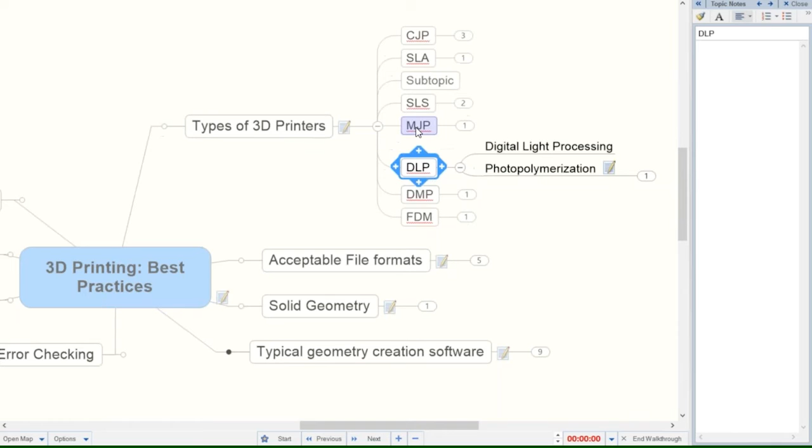Then you have digital light processing, or DLP. It's a process that essentially uses an ultraviolet laser and applies that laser to a liquid vat of material, again solidifying both the support and the actual finished part. It's a really interesting technology.

Then, believe it or not, very popular lately, direct metal printing, or DMP. Again, a technology where you have granular material with a hardening application, usually with lasers.

FDM is probably the most common. People who have only been exposed to a few 3D printers have heard about FDM in the form of the MakerBot or the plastic spool of printing, and that's considered FDM.

Basically, when you're ready to print one of your designs, or as we like to call it, bring your designs to life, the typical format is STL.

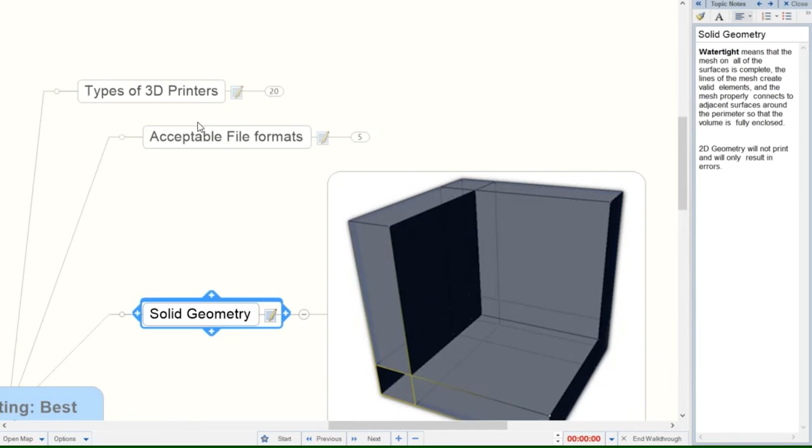STL is technically short for stereolithography, and the technology itself is also called stereolithography.

So the STL format, although it stands for stereolithography, has been the go-to file format for exporting your geometry out of the design author software.

Meaning that whether you're using AutoCAD or Revit or Rhino or some other application, STL is probably the most common format to export out.

STL has a couple of different options, like binary, and I forget the other one actually.

This happens, getting old. Dolly was kind and didn't indicate how old I am, but I do have a lot of years of experience in creating geometry.

So being an Autodesk reseller, Microsol Resources has an interesting combination of skills and offerings for you. Not only can we help you bring your designs to life by offering 3D printing services, we can also help you generate that geometry using the most common Autodesk or Rhino McNeel software.

So STL is the most common output. So whether you're in, and we'll talk about the actual types of geometry software that's available. So for instance, when I step back a minute, this is basically my presentation today. Talking about the 3D printers, we learned about the technology, and again, we can revisit that if anybody has any questions. Now we're talking about the available file formats, STL being the most common.

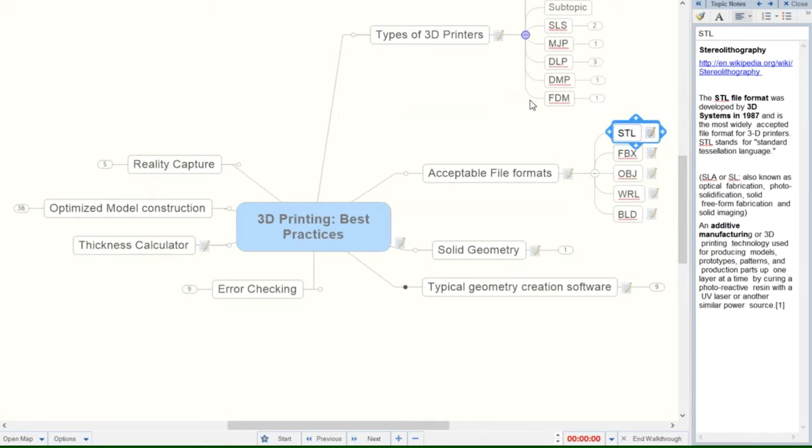But in CJP, or color jet printing, we're talking about an opportunity of adding color to the model at the printing process. So in your design authoring software, you would want to export a format that brings the color with it. STL is not that format. FBX, it's kind of interesting that it's the second file format that I'm bringing up. FBX stands for Film Box.

It's an Autodesk-generated file format, but has found itself all across multiple industries, all across the 3D printing geometry creation world. So that FBX or Film Box file format is finding itself in Revit, in AutoCAD, in 3D Studio Max, in Rhino. Again, we'll talk about the geometry creation software, but FBX is a great output, and it brings the color with it, baking everything in one file. So no maps or materials need to be sent along with the file.

OBJ is an interesting file format. It's been around for a long time. It's very useful depending on the output software. The WRL or VRML, the virtual reality modeling language, is very similar to HTML, but it's interesting that this single file format exports your geometry and brings with it color, materials, and textures. The only caveat is that when we export VRML or WRL, it requires us to export and include those maps as well.

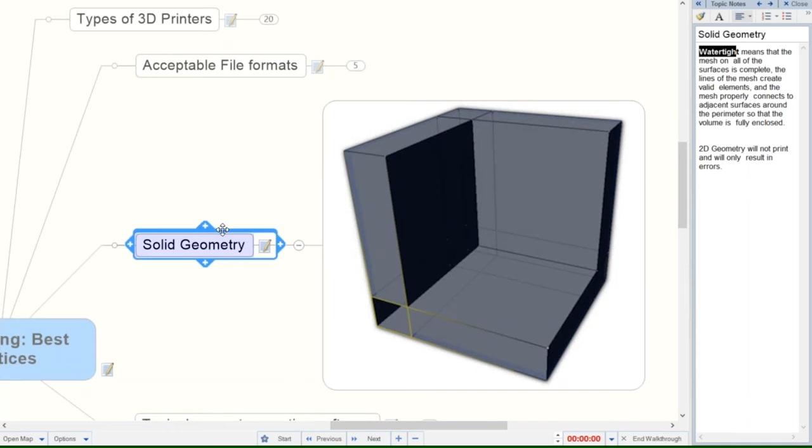When we do consider solid geometry or watertight, these are Googleable terms. So I'm going to show you a couple of great articles that talk about it, but basically you'll be able to find it. The industry is fantastic for assisting people in understanding what can come of it. What kind of software can I use to create a solid watertight file? You name it, we're going to be able to help you do that.

So I think most of the people in the office are using Windows-based applications to create architecture and such. Anybody using Macintosh? Not in the office, but I'm sure somewhere online. Do we have any questions? No, I don't see any questions at the moment.

Because we're an Autodesk house and a McNeel house, at the top of our list is Autodesk applications, and these are just a few of my favorites. So as Dolly mentioned, I'm a BIM specialist as well as a 3DP specialist, BIM standing for Building Information Modeling. Revit is the most fantastic tool for creating architecture and engineering models for the purpose of visualization, documentation, and obviously

3D printing. So when you create a model in Revit, you're going to have access to an STL out option or simply export to FBX. Those are two of my favorite options for exporting. It's right here available. So I have a couple of models in the back created in Revit Architecture. Those models were simply exported as STL and printed. If I wanted color, I would do FBX. Revit is a fantastic tool.

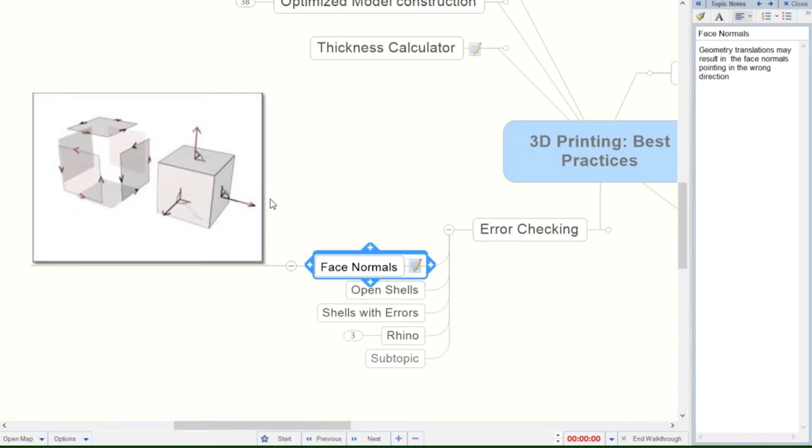So in this illustration, all of the individual surfaces were generated in the same rotation in 3D space. All of those vertices were shared, meaning they're coincident, resulting in a geometry that has all the normals facing out. So that's the first thing we look at. And a lot of my 3D printing software will just automatically fix that because it sees the center of the object and it pushes all those normals outwards.

The second thing is open shells. We're going to talk about that in a little more detail in the Rhino example, but when I'm talking about open shells, similar to that other image I showed, here it is over here, that's an open shell. So this face is considered a shell, and if it's open, then it doesn't close and make a watertight surface, resulting in an error.

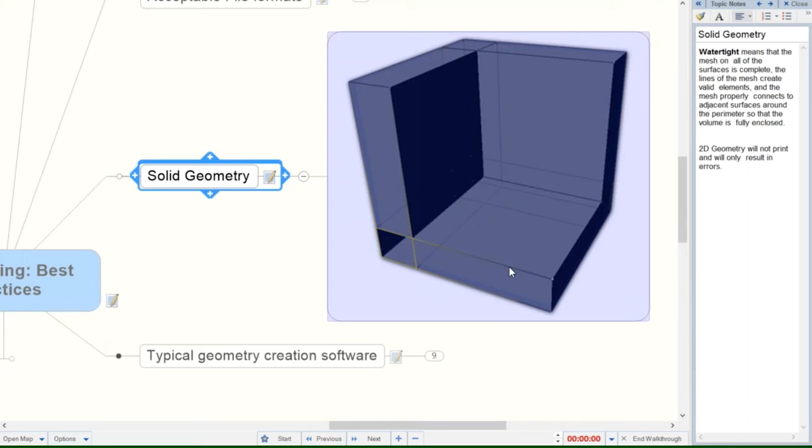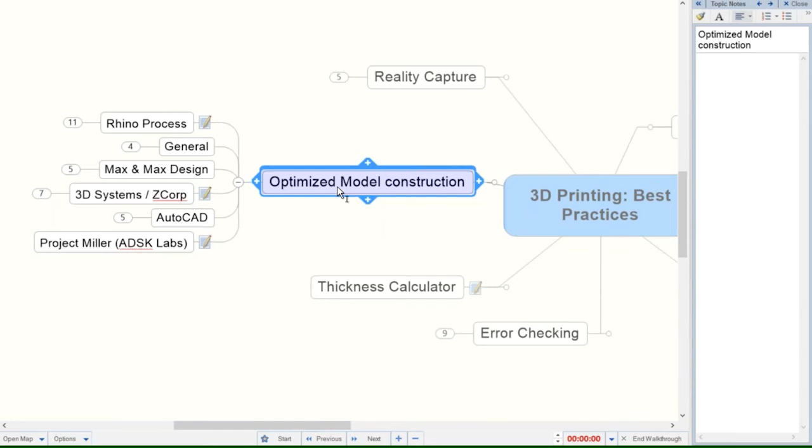Shells with errors, whether it's holes or line work that overlaps the individual face. We're going to talk more about that. Rhino has a series of tools to assist in fixing those pieces of geometry, and I'm going to expand it out over here and talk about that. So what are the methods for, one, modeling correctly originally, and then what are the error fixing commands and tools?

Let's talk about Rhino. Of course, I could spend a day or two talking about the processes of creating error-free, 3D printable, watertight solids, and I'm developing a class at the moment just for that purpose alone.

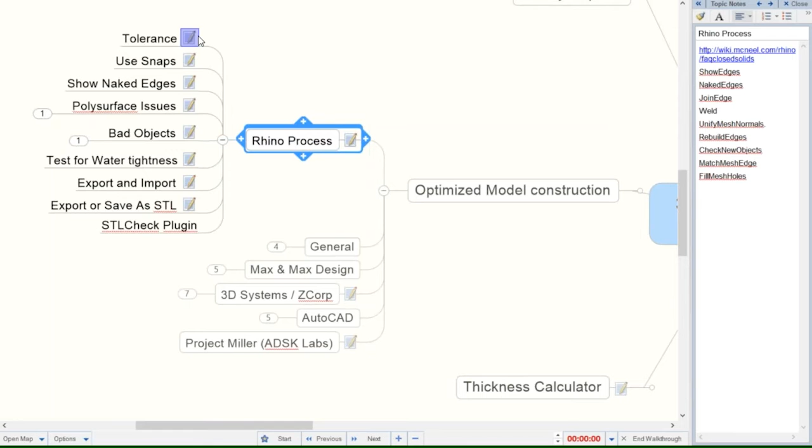But when we start learning about using Rhino, there's a series of processes, and this is somewhat in order of importance. So when you first get started, we're talking about tolerance. So you start with a Rhino model. You say, this is about what I want to create. I know it's a product. I know it's a building. I know it's a boat. I know it's a car or a toothbrush, right? So when you first start, you can use a template from Rhino, or you could essentially say, I want to start with a particular set of tolerances, particular set of things.

So when we're talking about tolerances, we're talking about the setting that dictates the maximum permissible distances apart that two objects or elements are permitted to be and still considered to be close enough for your purposes. What does that mean? When we move our cursor around the environment, you could see my cursor moving around like this, in different 3D geometry software, there's always an object snap or a world snap setting.

So setting a tolerance in Rhino means that my cursor is only going to move a particular set of precision or a particular set of fraction of unit, right, depending on your unit. So setting a tolerance within your design software is going to mean that it is most likely to be closed when I mean to be closed. You following me? I don't know if you've used AutoCAD. Anybody in here in the office use AutoCAD? So AutoCAD, snap versus object snap, two different settings.

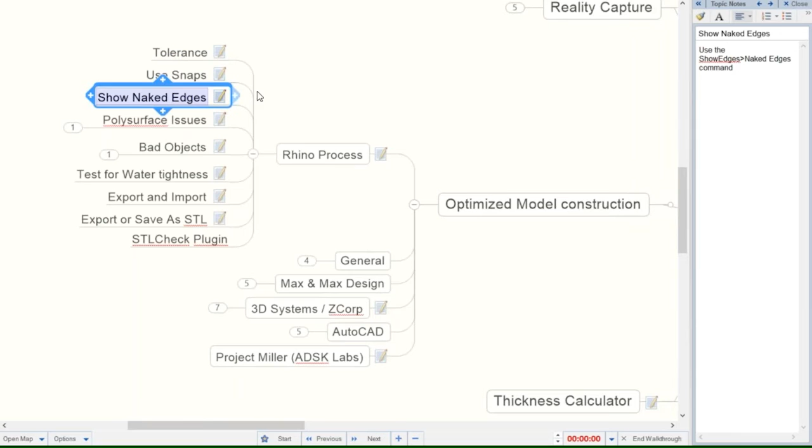We're also not going to want our surfaces to not intersect or touch or close. Tolerance is the place of moving. Snaps is, again, like I said, snaps or object snaps. Again, making sure that your cursor has a series of tolerances to be constrained. The result is going to be an object that is closed. Then we start to get into some discussions. Hey, don't think dirty when we're talking about naked edges. We're talking about objects that are not closed, and in fact that edge is open to the space and not coincidental or closed with another surface.

Then you have polysurf issues. So an open polysurf is similar to naked edges, but essentially means there's a hole or something not closing the internal volume. The command is SelOpenPolysrf. And as you type in Rhino, you start to type the commands. It shows you a series of commands that start with that set of characters. So it's really easy to find these tools. Of course, you can always go into the toolbar settings to figure that out.

But then there's a command that will show you what objects are bad. So the select polysurface is also going to do that. It's going to highlight different colors and illustrate what kind of problems the software thinks is happening, again, based on your tolerance. So SelBadObjects is going to highlight and give you an opportunity of selecting the objects that are bad. You go one by one. There's an actual dialog box that shows you what it looks like. So I'm going to actually see if this link opens up.

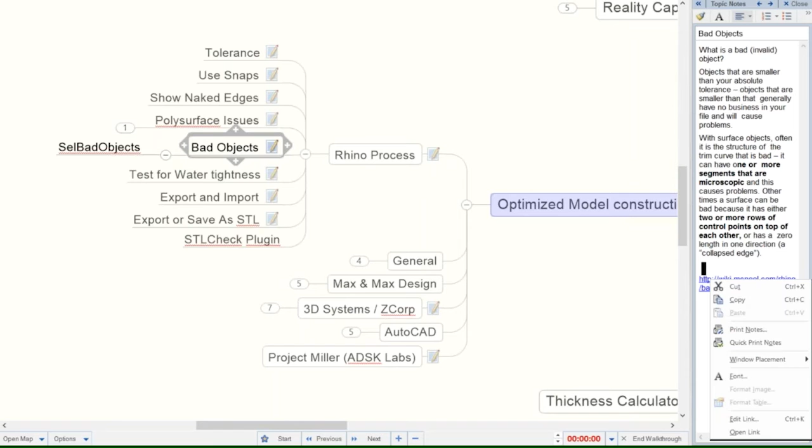Here it is. Here's the McNeel wiki about fixing bad objects.

What is a bad object? How do I know I have one? Use the 'select bad objects' command.

Suppose I want to take them out and replace them, so extract bad surface. There's an enormous amount of tools for working in Rhino to make an object ready to be printed.

It's going to bring you to those objects and highlight them. If you don't run these commands, Rhino will complain if the object has those problems in the first place. It'll tell you that a certain number of objects were selected but only a certain number were exported when you do the STL.

If I search 'Rhino Wiki Solid,' that's another great resource, bringing me to a different page on the McNeel Wiki: how do I make a solid model? There's an enormous amount of resources, one of the reasons why I love McNeel and Rhino.

They really are doing their best to help you out. A wiki is something contributed to by the community and the industry, as well as by the employees, so it's an amazing resource for your viewing pleasure.

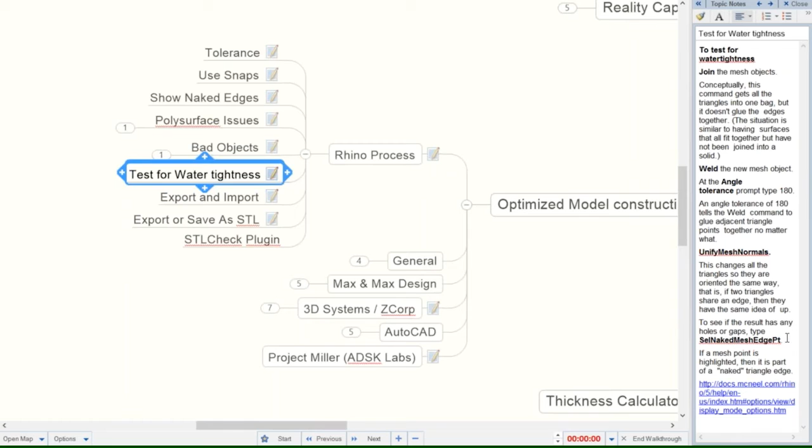Things like testing water tightness. It's a simple option, you just start to type 'unify mesh,' or 'select naked mesh.' Look at the length of that command.

They're really easy to find. They're not difficult, and there's a lot of really good resources available to help you find that.

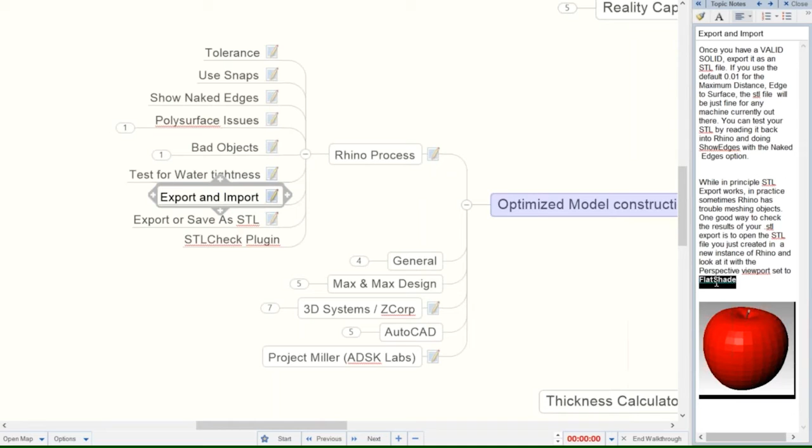When you finally go to export that geometry out of Rhino, you get a simplified rough preview showing how many surfaces you have. It will even highlight edges that are open. A flat shade modification to the view will highlight what that model looks like in a rudimentary, diagnostic kind of way.

When we actually go to export, we have options for saving geometry only, and an option for 'export only open objects' — well, that kind of makes sense. If I'm exporting an STL out of Rhino, I don't want to export things that are open. Actually, this should say export closed objects — why would I want to export open objects?

Essentially it's asking: do I want to export the geometry only, or everything that was in the Rhino model? When I say export geometry only, it's not going to export line work, which is useful since that's of no use to me in the 3D printing world anyway — amazing kind of resources.

So I mentioned there was binary STL, which is my favorite, and then ASCII. Again, ASCII refers to solid geometry that the industry is very familiar with. It's the most common type of geometry out there, and it's an option for the STL. I usually stay with the ASCII STL.

I'm sorry, I usually stay with the binary. But hey, send us both and I'll tell you which one is better.

Save small gives you an opportunity of lowering the number of faceted surfaces within a certain tolerance. It's a cool optimization if your geometry is simple. If the geometry is complex, that's not something you want to do — you don't want to lose resolution or lose smoothness.

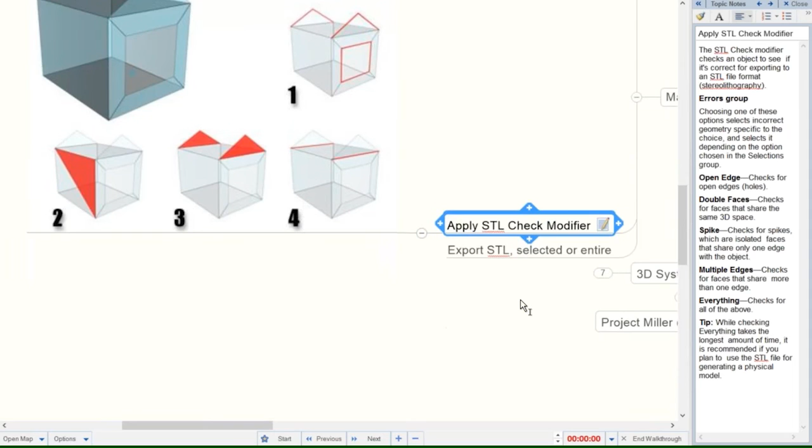Then in Max, there's an STL Check Modifier. It runs through and highlights edges or surfaces that are not closed, not solid, or not watertight. You apply it to your geometry prior to export, and it runs through and gives you a bunch of options.

When I export STL, you could do Export Selected, and the resulting STL will only be of the selected geometry. So if you have a large complex scene, or if you want to send me individual pieces, just do a selection. You don't even have to isolate it. The Export STL Selected option will do that for you automatically.

That was 3D Studio Max. 3D Systems, which we were previously a Z Corp reseller for, has a bunch of options or suggestions for doing that. There are error checking pieces within the software. What 3D Systems software? When a client buys a printer from us, and we have about 30 or 40 printers in the area, those clients get a piece of software from 3D Systems that allows them to do error checking and prepare the model for 3D printing.

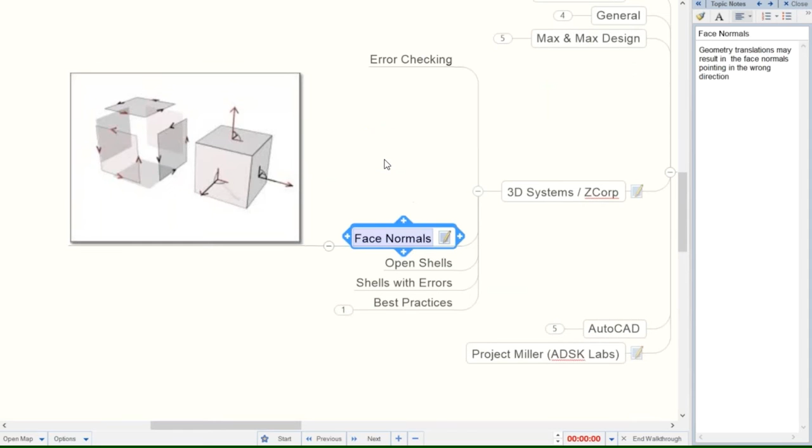So it does error checking, shows you all of the elements that are questionable. It does the face normals, it checks for open shells, it checks for shells with errors, and in general, here's a guide for best practices.

It originally started with the Z Corp company. Z Corp got acquired by 3D Systems. So Z Corp basically started with the CJP, or the powder-based printing, where binder is applied to powder. 3D Systems acquired it and has improved upon it for the last 10 years or so.

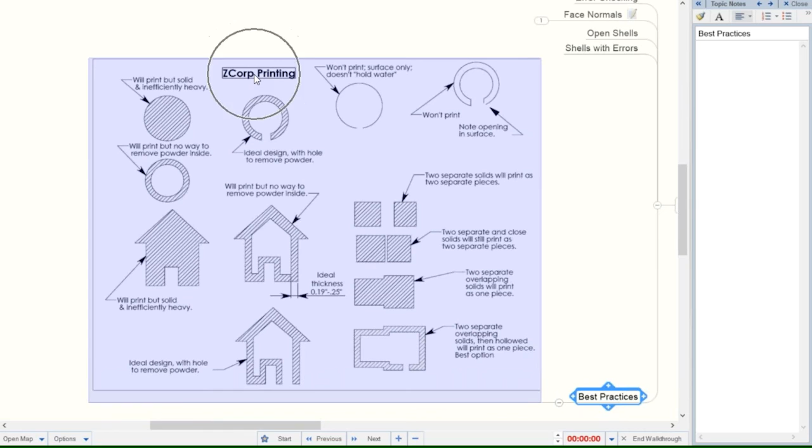Another example, right, hollow. That opening, or that hole, is going to allow us to recover support material. In this particular technology, the Z Corp or the CJP technology, if you were in the office, you're going to be able to see the Projet 660 working, and that technology is the powder-based binder technology. So this technology is definitely unique in the industry.

So the support material is the dry powder. The bed is filled with powder, the binder sprays an adhesive or binder onto the powder, that solidifies. All the dry powder is essentially support, and when the print is done, I get to collect or vacuum up all of that dry powder. None of it goes to waste. The only thing that is solidified is your model.

But by doing so, that would require us to do a little bit of adjustments. If I were to print something like this, like a cylinder, let's say, that's closed on the top, the powder would be captured inside that geometry. I would have to charge you for that powder as well. So when I say charge, we charge for the amount of material used.

So in this example, if this was a cylinder with a cap, that hole would allow the powder to be collected, and thus it wouldn't cost you that. We wouldn't charge you for that material. You could print it like this if you want. That would be a solid brick, or a solid object, much heavier than this object.

So anyway, these images are basically repeating the same thing. Do I model a house without a gap? No, that's going to leave the powder captured in there. Do I model a house with an escape route? Yeah. Why not just get rid of this whole piece here so that the base of this house is completely open to below? That saves a lot of material. We only charge you for the material used.

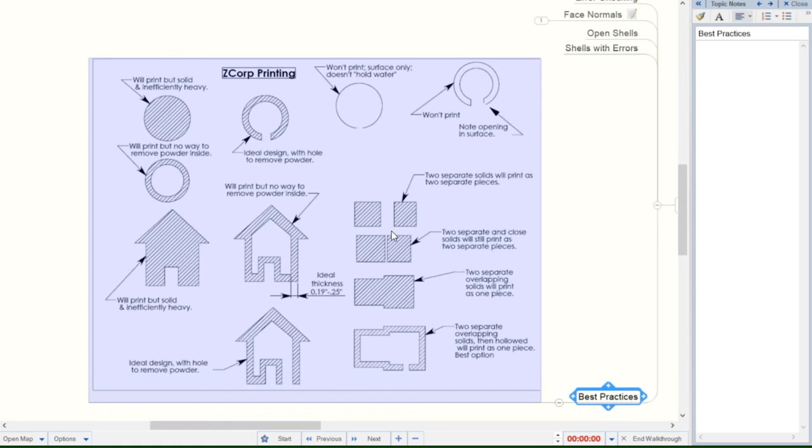This really goes for all of the printing technologies. But as we'll learn, the different technologies use different support materials. Some support material has to be broken away. Some support material can be melted away. Some material has to be jetted away with a high-pressure water jet. Anyway, each technology has some best practices. We have collected those best practices, and we'll share them with you when you're ready.

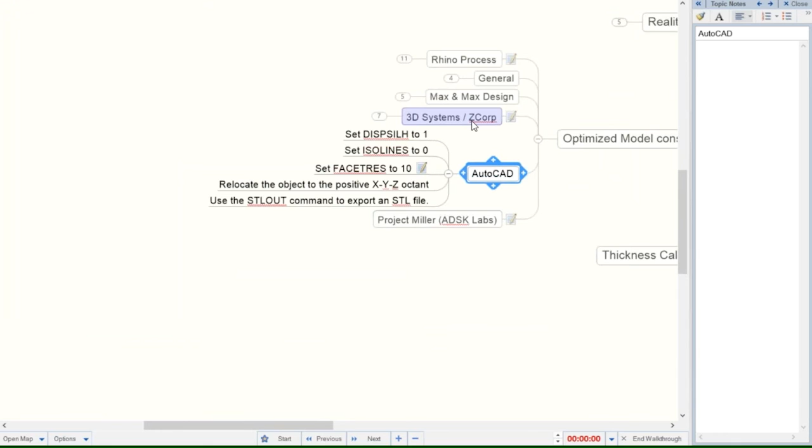So 3D Systems, again, I have access to those tools. If you have a printer, you will have access to those tools as well.

AutoCAD. If you're an AutoCAD user, let's zoom in on that stuff. There are going to be some options for making sure that your geometry created in AutoCAD is the best that it can be, ready for 3D printing.

Anybody know how to pronounce that? Nah, it doesn't matter. It essentially says to display the silhouettes, or change the way that the geometry is rendered. The export result will rely on that to create a smooth geometry.

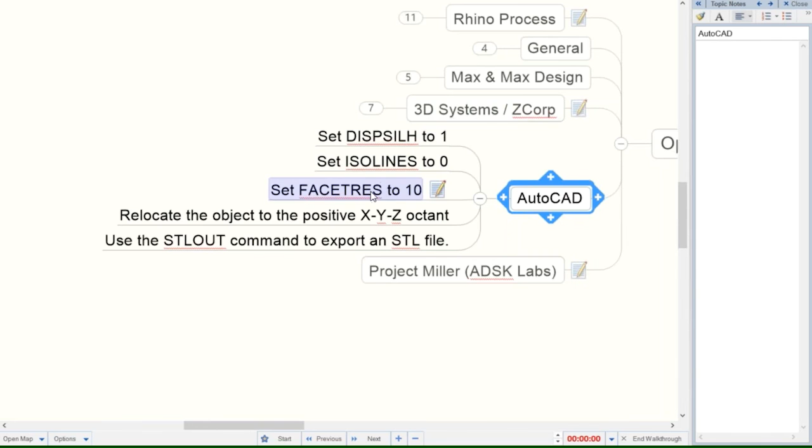Set ISO lines to 0. That again helps to create a geometry that is less faceted and more like the desired result. These things are pretty useful when you're dealing with curved or cylindrical objects. Same with facet res, a system variable to adjust the facet density based on the setting. If you type in facet res and it's asking you what the value should be, you type F1. Bang, it gives you all the explanations of the suggested results. Higher values create a finer mesh, right?

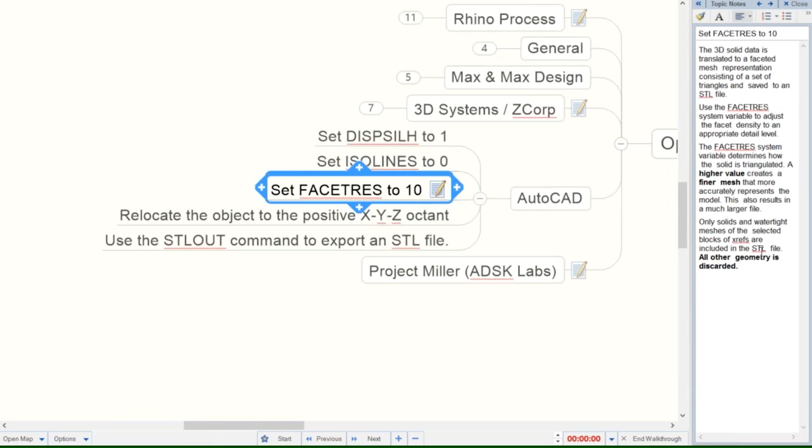Only the solid and watertight geometries are going to export anyway, so we want to make sure that geometry is exactly the way we want. This is kind of surprising, I didn't know that geometry created elsewhere in the world space in AutoCAD would be less ideal.

Putting your geometry so that the XYZ or 000 origin is the lower left-hand corner is very common for AutoCAD users. It's important to be in a positive axis or the positive quadrant when exporting surfaces to 3D printing. It comes back to how a 3D surface is created, in a three-dimensional counterclockwise fashion. If our geometry is in a positive quadrant, that information is cleaner and more ready to go.

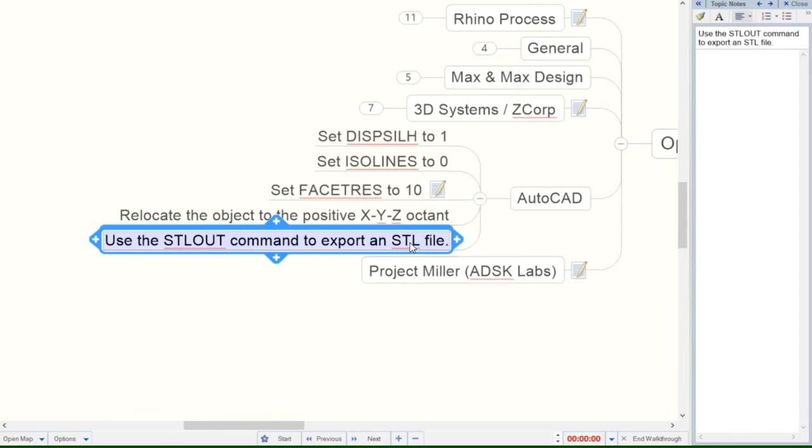Simple STL out command, STL out, will generate that STL and start the process. Usually it says select the objects, then it goes ahead and asks, do you want binary or do you want ASCII?

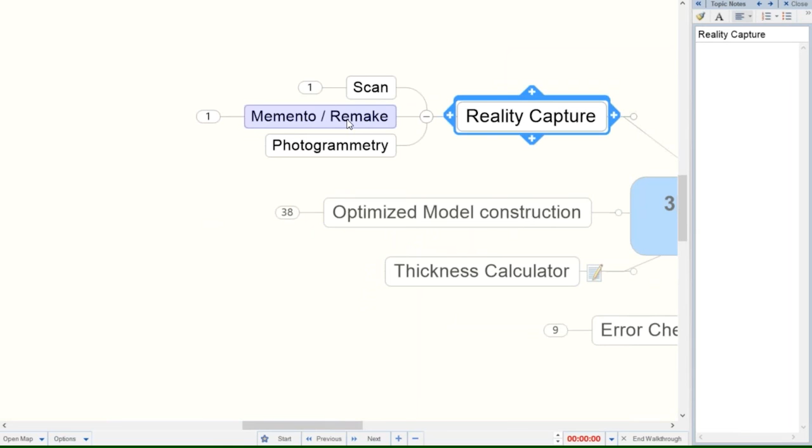This is a little out of date, but Project Miller was an Autodesk test or beta program. There's a lot of tools that have been developed by Autodesk to assist us in creating STLs, and I'm going to talk more about that in a minute. That Project Miller thing kind of graduated to a reality capture tool that Autodesk is now selling. It used to be called Memento, now it's called Remake.

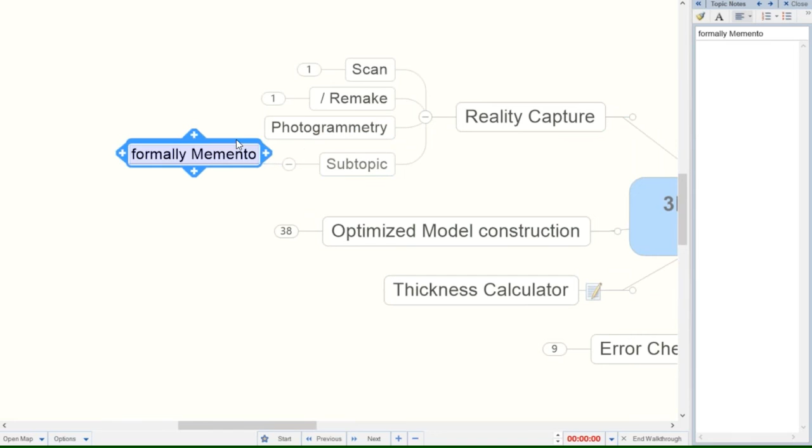Maybe I'll just cut it out and say formerly Remake, or formerly Memento. Okay, Remake is the tool now. It's a fantastic tool for capturing geometry.

Now, what does reality capture really mean? That means we have a real-world object in three-dimensional real space sitting on our desk or out in the world. We want to capture that geometry, manipulate it, enhance it, recreate it. So reality capture means capturing the real world and putting it into my computer so I can reproduce it.

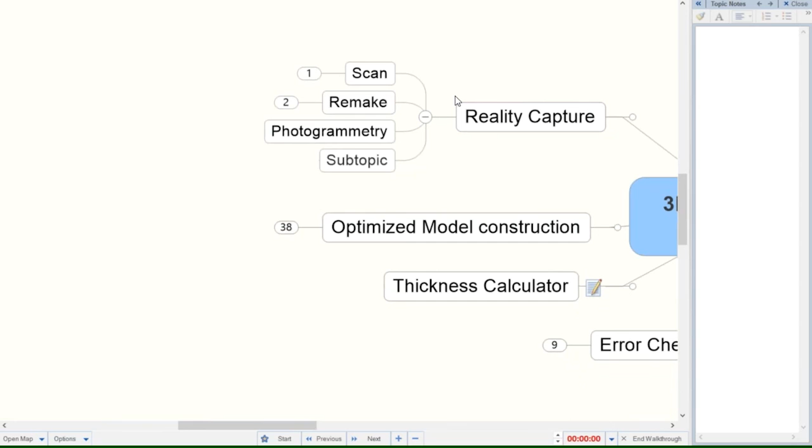One day we're going to have the Star Trek tool that sits in my office and generates Earl Grey hot, but right now we have to go through a certain process of capturing the geometry, putting it into 3D software so that I can optimize it and print it out.

Reality capture can be scanned, so laser scanning. That means I can actually use a laser scanner to capture the geometry with color, put it into the computer so I can manipulate it, scale it, maybe make holes in it, maybe adjust it to print it out.

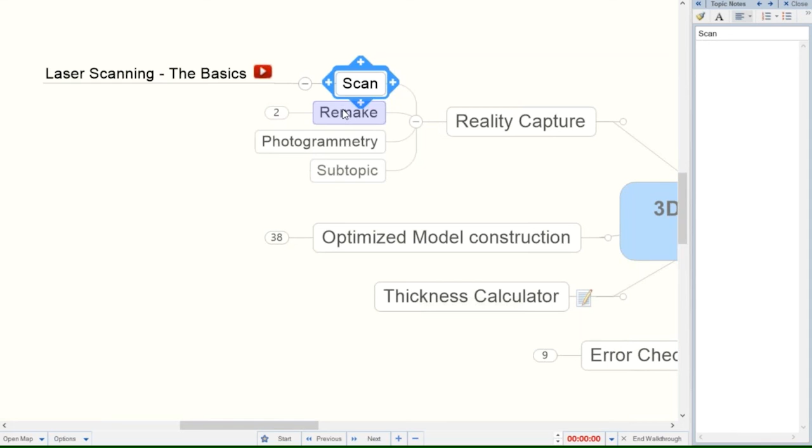In addition to scanning, we can do photogrammetry. Remake is actually very popular in the photogrammetry world, but Remake also manipulates geometry from laser scans as well.

What is photogrammetry? Essentially the technique of using a series of photographs to capture reality and create actual 3D solid geometry out of it. I have some fantastic examples of pieces that were photographed in the real world and then turned into printable geometry. It's a fantastic, fascinating technology, and Autodesk is one of the companies leading that effort.

So let me show you an example. Photogrammetry is the use of photographs or photography in surveying, mapping, and measuring distances between objects.

It essentially means that when I go through and use software like Autodesk Remake... not just Remake. Hello? Autodesk Remake, how come Google doesn't know what I'm thinking? So Autodesk Remake, I have to sign in? Yeah, you know who I am. Autodesk Remake is essentially a tool. It wanted me to sign in because I already signed in, I have a different access to Remake. You can go out to Remake and actually try it for free.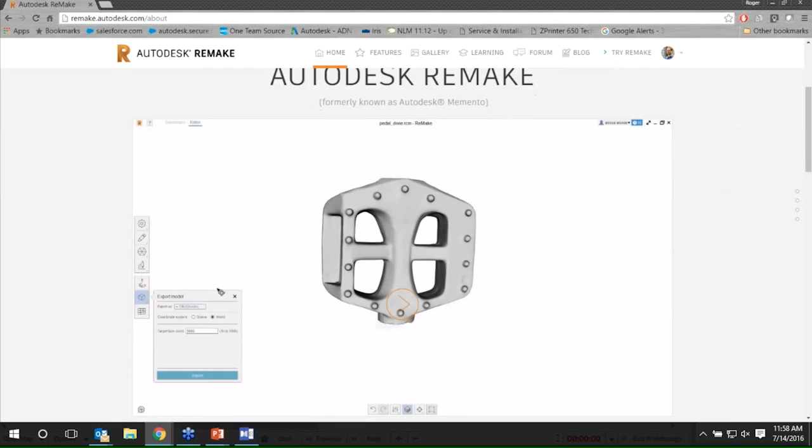Remake is that tool by Autodesk that's going to allow us to take a series of photographs or take laser scans and turn that geometry into real-world objects. It's fascinating.

I'll let this run for a moment. I'm sure there's audio, but not necessary right now.

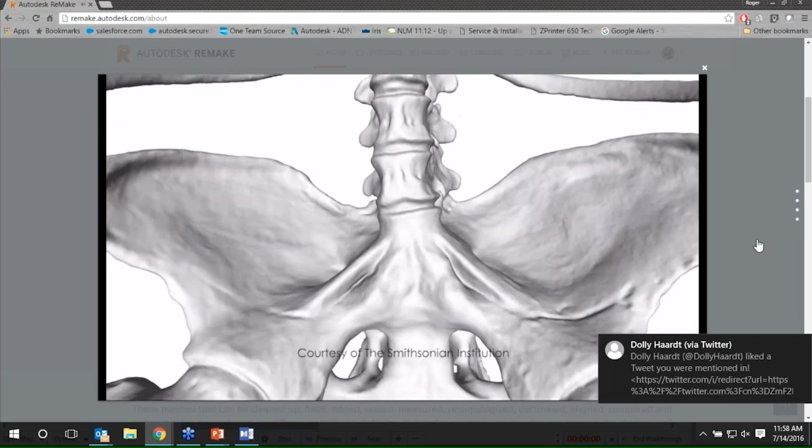MRI scans, CAT scans, laser scans where it's handheld lasers, photogrammetry, taking geometry from the real world, bringing it into the computer to manipulate and recreate, reprint, or just simply study.

Fascinating examples, photos, scans. I'm going to show you some stuff. Fascinating examples.

We're running out of time, aren't we? Getting close to that hour.

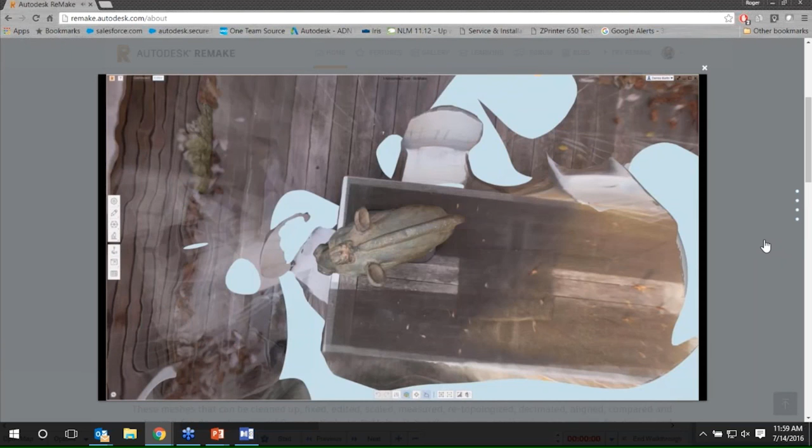All right, so anyway, check out, just Google Remake, and you'll find some fantastic opportunities for that.